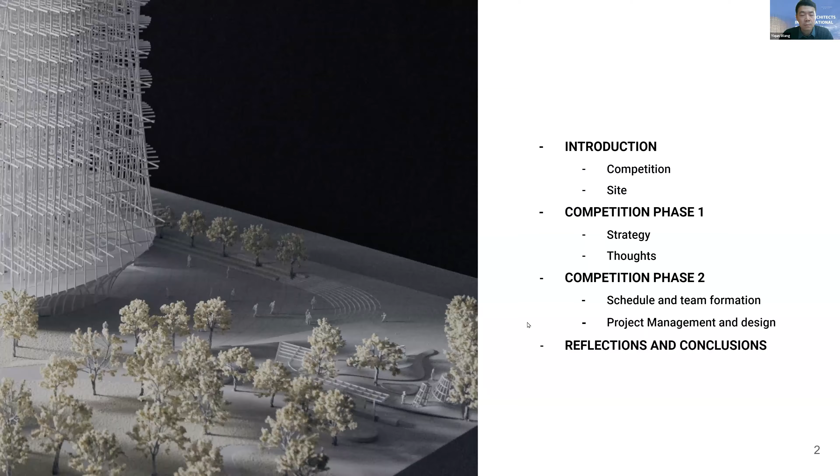I think you are muted. Okay, can you guys hear me? Yes. Okay, cool. Yeah, thank you for the introduction.

My name is Riza. I want to thank China GSD for the invitation, and Talks from Cambridge for organizing this event and inviting us to share our experience. I will start by introducing the competition and its context. I will walk through our initial design for phase one and talk about how Qinrong and I collaborated on phase one, so my part will be very short. Then Qinrong and Zishen will talk about the experience in phase two. Hopefully you can see the sheer increase of complexity from phase one to phase two.

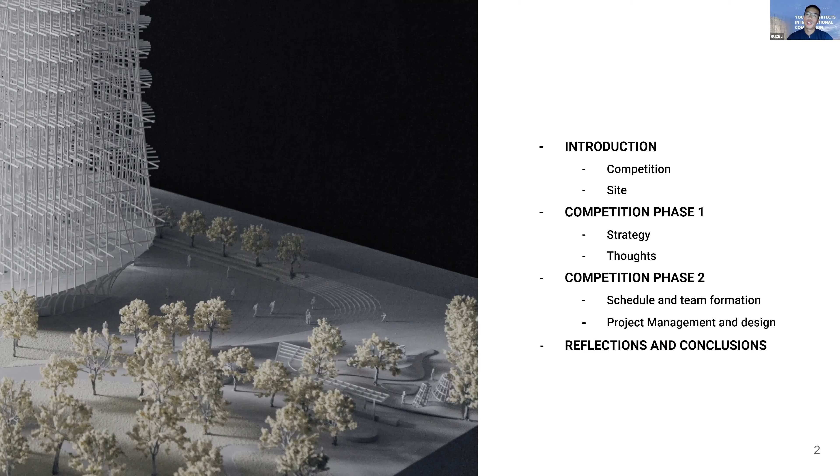I think retrospectively, there are many unique aspects to our experience. Firstly, it happened during the pandemic, so we were forced to collaborate in a very different fashion. Secondly, it started from a very small two-page competition proposal, and all of a sudden it expanded into a multi-team project involving over a dozen companies. In phase two, Yuqing, Zhengcheng, Zishen, and Caoqi also joined our design team, and we formed a small practice called Comunio. Last but not least, the competition itself offered a great deal of opportunities, and we, as fresh graduates with very limited practical knowledge, had to take leadership and deliver the project. So even though in the end we didn't win the competition, for us it was a very valuable journey.

So I will start to introduce the competition now. The original San Jose Light Tower was constructed in 1881 and destroyed in a storm in 1915. The light tower itself was a pioneer in the use of electricity for municipal lighting. Some may even say it inspired the creation of the Eiffel Tower and many subsequent tower-type landmarks in our generation. San Jose, on the other hand, has become the center of Silicon Valley, the heart of technology, entrepreneurship, and innovation.

However, unlike many big cities in the States, San Jose doesn't have a city icon that represents the image of the city or celebrates the achievement of Silicon Valley.

So some local community leaders started this competition called Urban Confluence to call for a design proposal. It states that the mission is to build an artistically inspired iconic landmark that will become the architectural legacy of our current generation of leaders, and present it as a gift to the city of San Jose, Silicon Valley, and to the world. The competition was announced in late 2019.

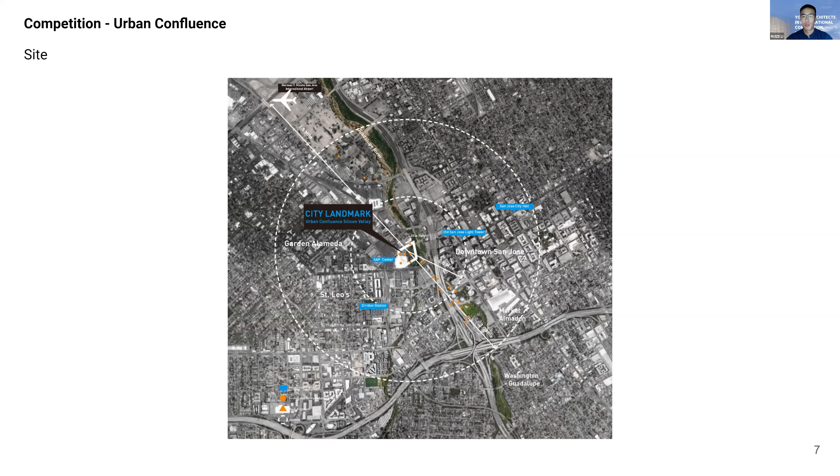The site is located in a park called Arena Green, right next to San Jose downtown, across the Guadalupe Freeway. It's been announced that the surrounding area will be developed by Google in the next 10 years. Though right now this area isn't really developed, potentially it will be the new downtown in the future for San Jose.

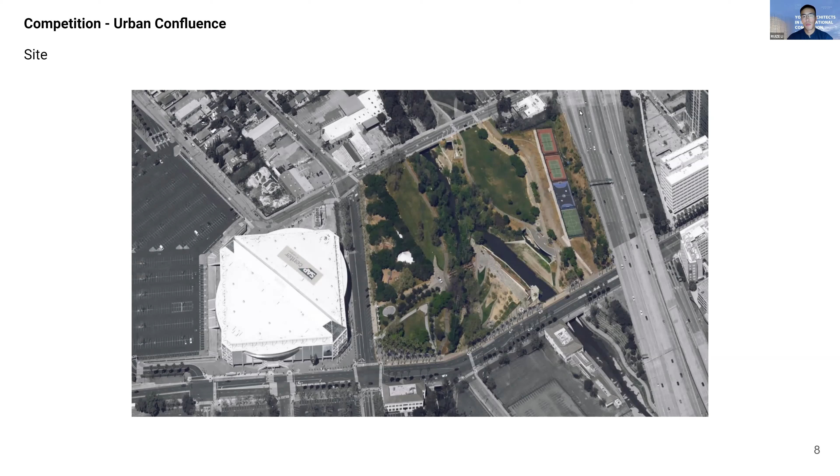Arena Green Park is right next to the SAP Center, home for the San Jose Sharks. The Guadalupe River runs across the park. If you think about it, 10 years ago it was a paradise for birds and fish. Now the river is heavily polluted, though the park is still used for its green lawn and some sports facilities. Generally speaking, the park is in very bad shape.

So in phase one, we only needed to propose a design idea on the site for the icon. In phase two, we actually had a lot of design interventions on the whole park, both in the sense of landscape design and urban intervention.

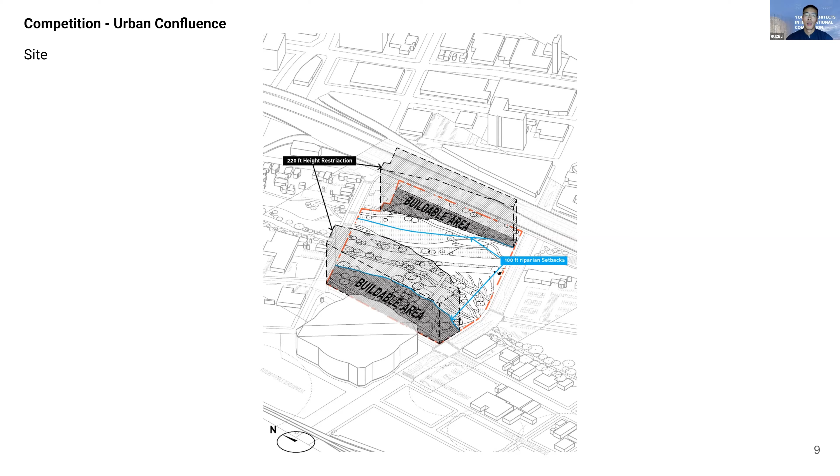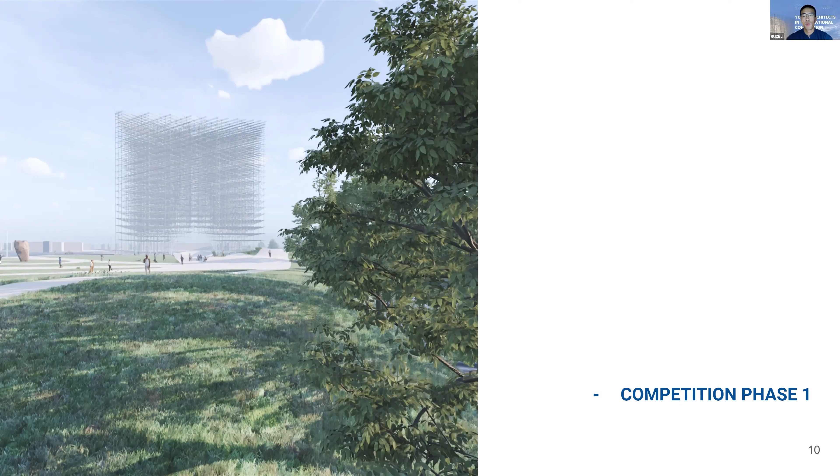For phase one design, if I recall correctly, we had probably over a dozen design iterations. We tried and failed—nothing really captured the idea of what is the city icon for our generation. So we restarted and tried to formulate a narrative in order to define what the icon of our generation should be.

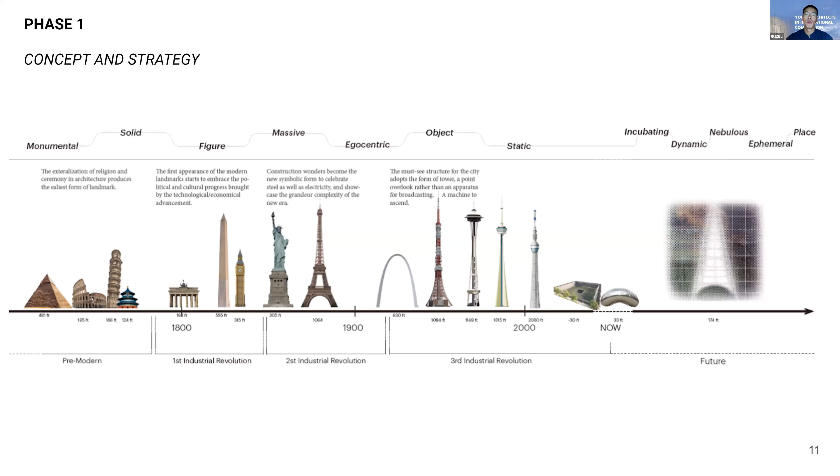We did some historical survey of landmarks and monuments, and we had this idea that the icon of our generation should be a place instead of an object. It should be dynamic and ever-changing instead of heavy and static. It should be incubating and inviting instead of just egocentric. Also, it should resonate with history, but still tell the story for the future.

So we had this idea—maybe we should embed the original San Jose Light Tower in some kind of generic frame that can be a virtual canvas or incubator for placemaking. On the right hand side, you see one of our very initial sketches, trying to capture the conceptual feeling of the future landmark.

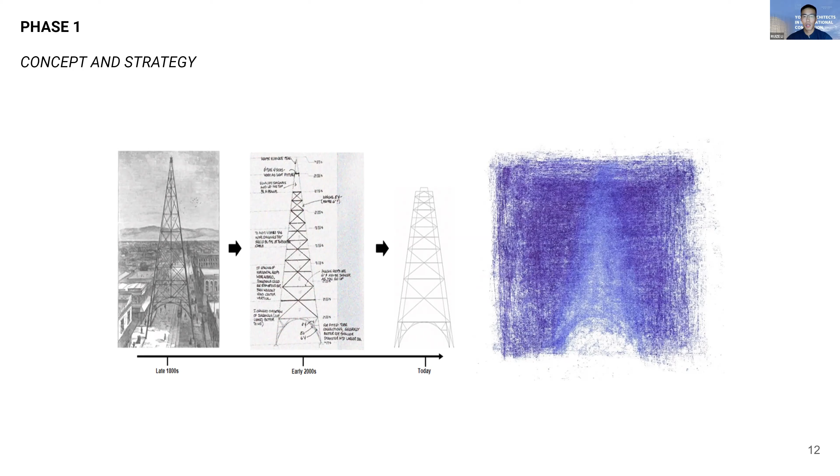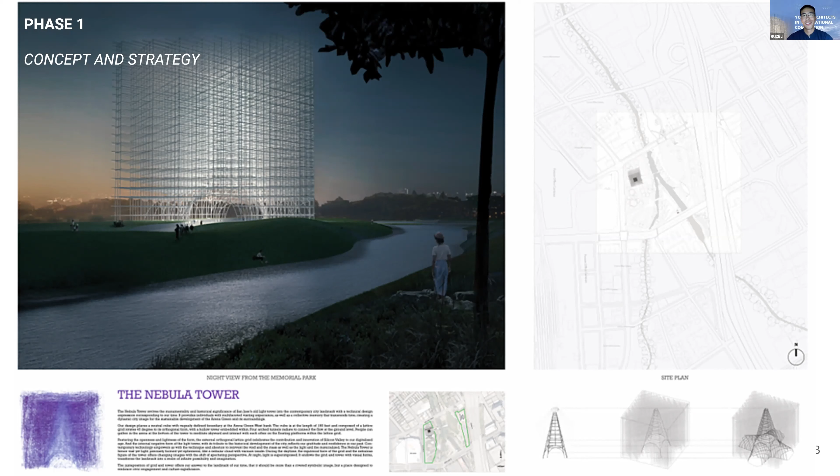It's a really simple and conceptual idea. There are two versions we actually submitted for phase one. We mainly wanted to capture the elegance, simplicity, and potential for the design. The design isn't resolved or developed in any way, it's purely conceptual—as you can see, it's just very unclear renders and some very simple drawings there.

Here's a short video. We can imagine the framework can be a 3D canvas to host all kinds of art installations and lighting installations.

So here are some challenges for phase one for us. Both Chino and I work remotely. We chat through Zoom like this every day and communicate through Zoom screen sharing, sketches, and 3D models. We have to consistently guess each other's design ideas and intentions, and ask each other to clarify things again and again, because the verbal communication and the visual don't really align together.

So the whole final design emerges from arguments, fighting, and rejecting each other's ideas. But I think those arguments and discussions are the most valuable things, because in the end, it's not one person convincing the other.

It is the better idea and better design solution that emerges from these discussions, and it convinces both of us.

Planning didn't work for us at all. We had a detailed schedule in Excel at the very beginning of the project, stating that in certain weeks we wanted to achieve certain things. But in the end, we spent 80% of our time on discussion, about 10% on modeling, and 10% on production. So planning will be a very different story in phase 2, and without proper scheduling, we won't be able to make it in phase 2.

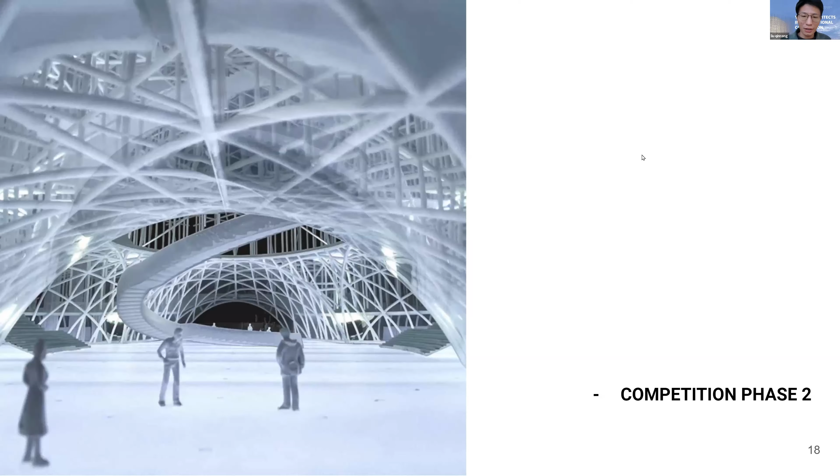Okay. So we can go to the next page. Rita, can you mute yourself?

From this page, we can see the timeline from the end of phase 1 to phase 2, and basically the structure of the Nebula Tower iterated from a pure cube to something more hybrid. But the urban strategy of our proposal stayed unchanged from phase 1 to phase 2, because the location we picked, the access, and the new connection we established in phase 1 remained in phase 2, and it actually became the strategy for almost all three finalists in phase 2.

What's different about this competition is that it goes so public that we get a lot of community feedback and public comments—some positive, some negative. But because this is a public project, you need to take all of them and digest them. On the other hand, you still need to be persistent and clear about what you need to do in this project, because after all, you do not know to what extent the public's comments will affect the jurors' attitude about the design.

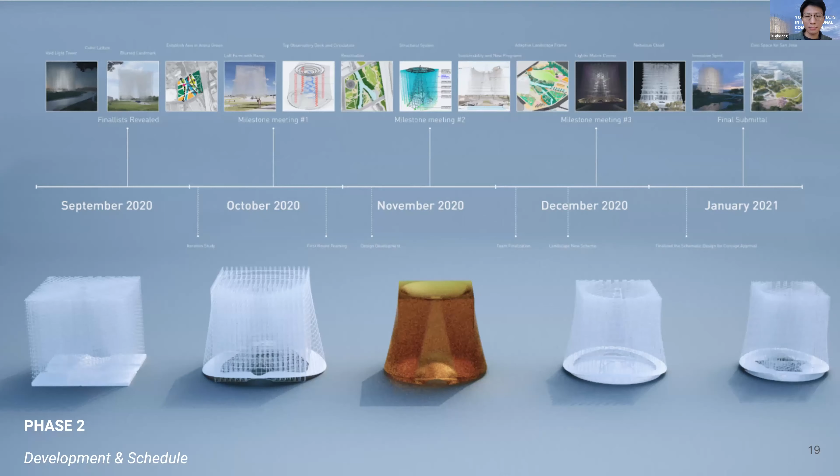Let's go to the next page. What troubled us at first was how to assemble a team in as short a time as possible. But actually, we didn't make it as we expected to.

We wanted to assemble a team within maybe a month, but it actually took much longer. At first we thought we should go for small firms, because they'd be easier to communicate with and more efficient, and we were afraid big firms might take control of the project or overwhelm us, making communication more difficult. But actually things went the opposite way—smaller firms, in the time of the pandemic, found it more difficult to take the risk of participating in this kind of competition, since they don't have enough stipend, while the big firms were interested in this kind of opportunity.

They would like to take the risk to be a partner with you and work together. So finally, with the help of the client, we reached out to HKS, and they also brought a lot of other consultants on board with us.

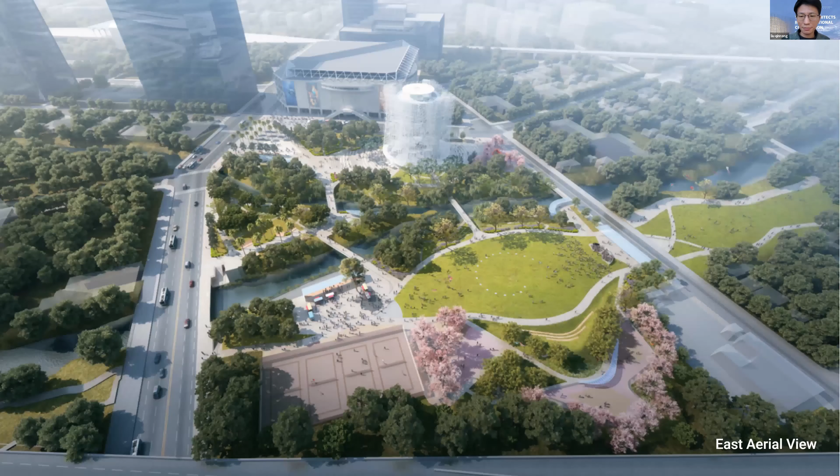So our main focus for phase 2 is basically to develop the program, try to solidify the structure, reiterate the form, and invest more in the landscape design for the urban environment.

As you can see from this aerial view, the Nebula Tower is located at the northwest of Arena Green, and there is a plaza that goes underneath the Nebula Tower from south to north. We also added two bridges to connect the west and the east. Zishen will introduce more details on the design of Arena Green Park later.

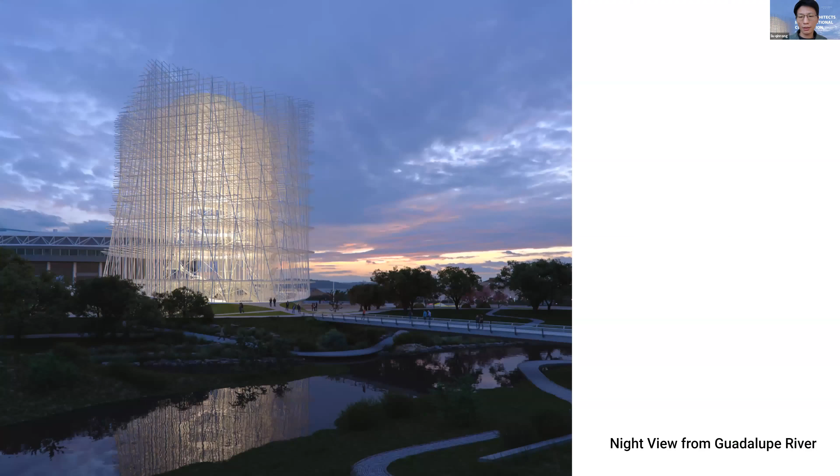This image is a view from the trail across the river, and this is the poetic rendering image that we love the best, because it clearly shows the blurred boundary between the structure, the light, and the nature. The revealed symbolic figure of the light tower, I think, really evokes an emotional bridge for people about the memory of the past and the imagination of the future.

It also shows how you can walk through the bridge and get to the ramp level directly. The structure here emerges from the ground, but it still looks very lightly floating on the landscape.

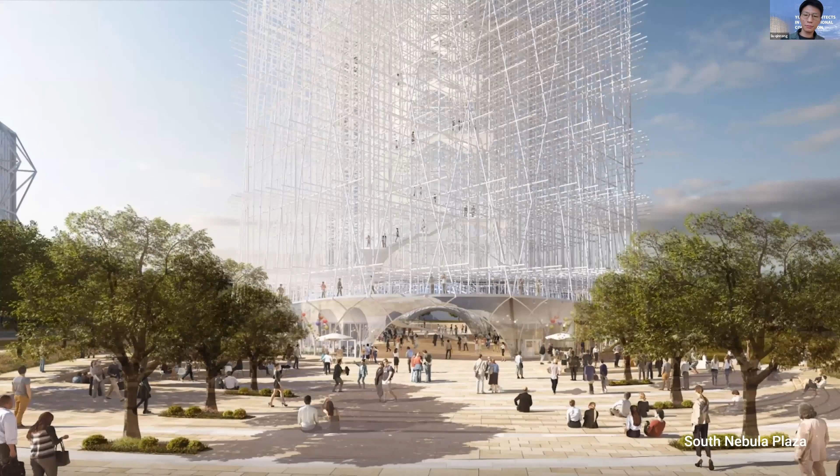This is the Nebula Plaza on the south of Nebula Tower. Visitors can draw into it, and this plaza aligns to the existing urban environment.

Because this is the image of the daytime of Nebula Tower, you can see how it looks like a vaguely pixelated cloud floating above in the background. It shows a very open and welcoming gesture, which makes it so different from other landmark projects in this world.

What's important about the design is you can see all the lattice within it is 45-degree rotated, but they are still orthogonal with each other. This is an important move we decided to do because it can break the boundary reading after all. Otherwise, the boundary of the Nebula Tower would be too clear to read.

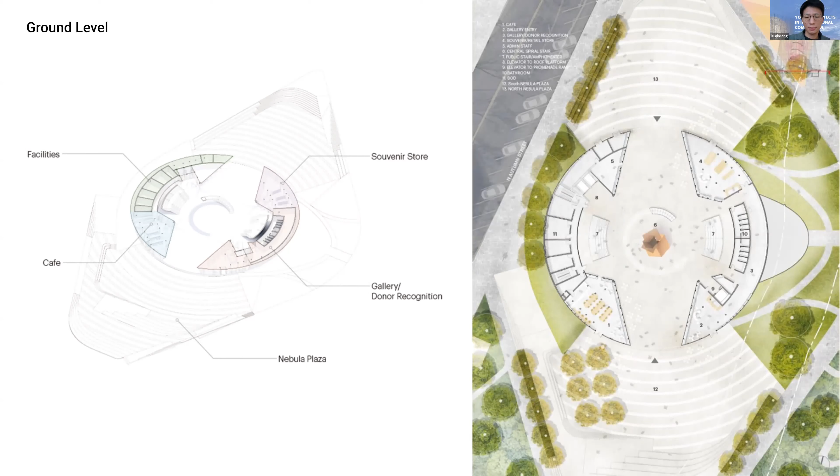The central plaza is a flexible space that can accommodate sculptures, especially large-scale exhibitions, and could also be used for live performance art as well.

This is the linear space at the east ring, which is under the landscape. That is a flexible zone for donor recognition alongside rotating art exhibition. This is a program that the client strongly required.

We are arriving at the promenade ramp level. This is the interface, both urban and natural. This level is both inward and outward because inwardly it's integrated with the central plaza, and outwardly the landscape seating also offers a pleasant resting place for viewing the Arena Green as well.

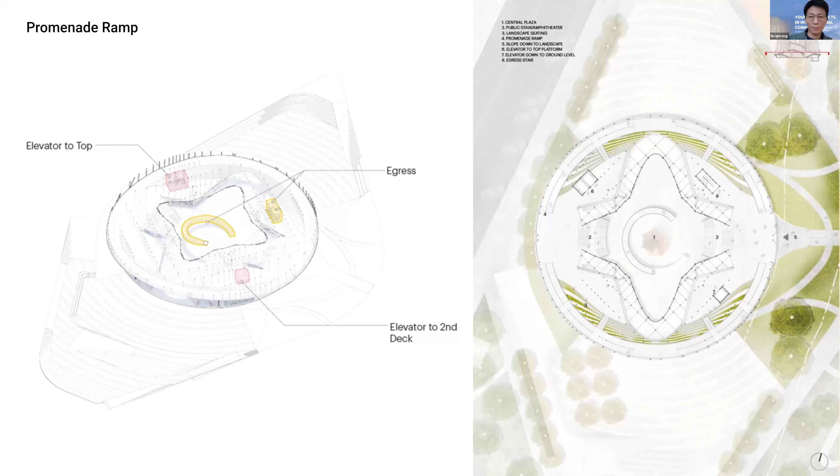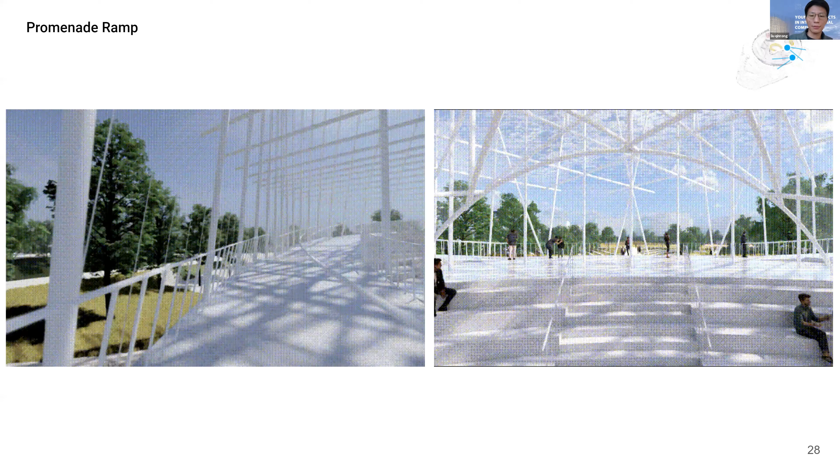Those are two GIFs that show the sequence of how you can ascend from the amphitheater seating and the ramp level while immersed in this delicate lattice structure, and visitors can enjoy the view of the park through the ramp sequence.

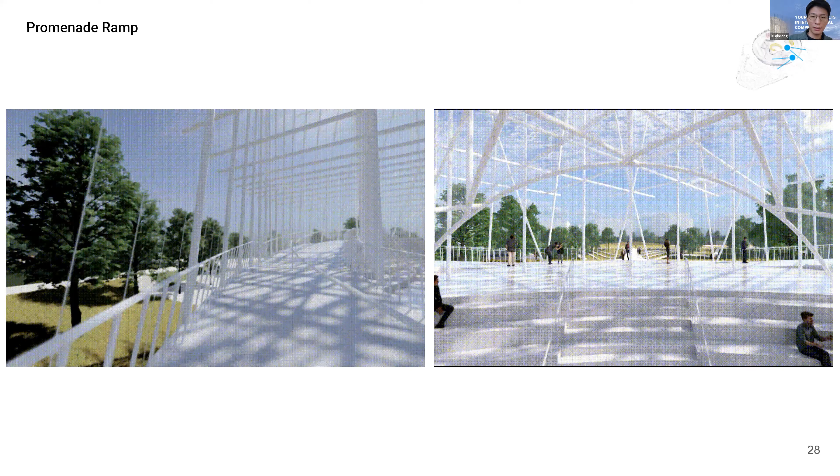We also added a visitor center, or let's say an event space, at the top of the Nebula Tower for people to overlook the city, because it's a place that is very close to downtown, where you can also see the distant mountainscape.

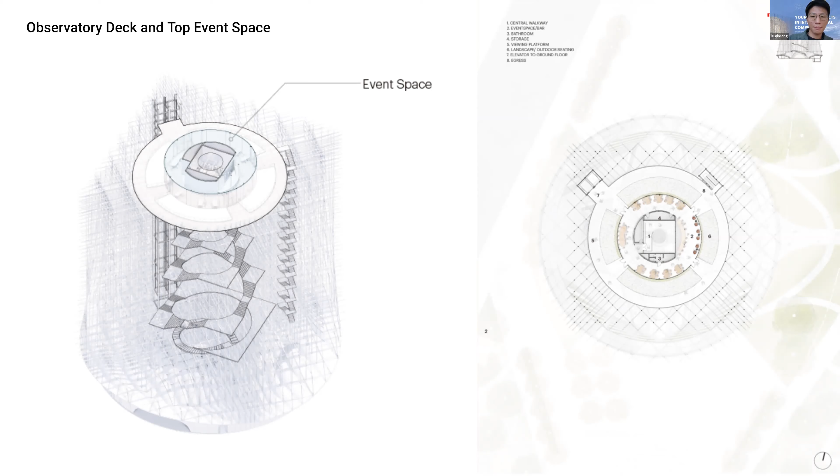The North-South section cutting through the central plaza illustrates the abstract open flow space at the ground level, which connects the architecture, the landscape, and the urban environment, which also makes use of the atrium of the hollow tower inside.

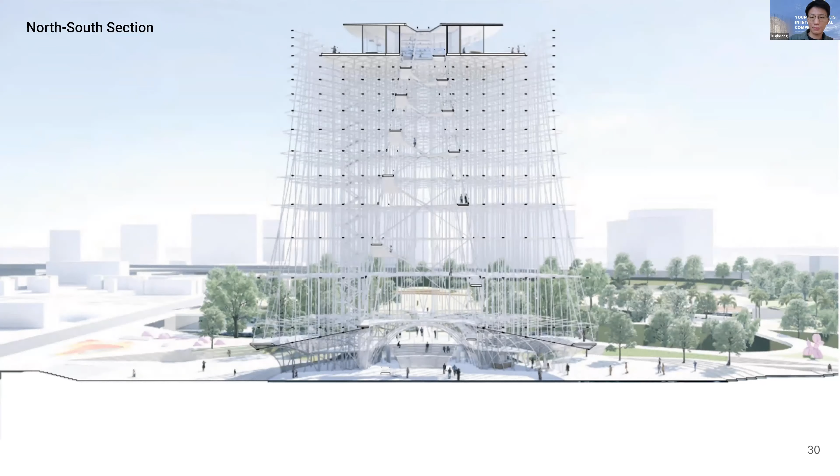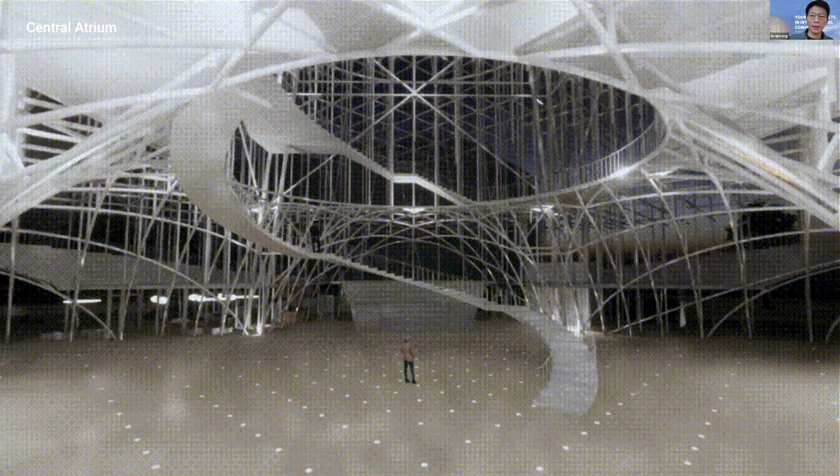This is also an animation that shows how you are standing inside the central void, surrounded by this immersive environment created by this monumental repetition and the enormous lighting matrix.

When we are approaching the central stair of the void sequence in the middle, it also offers the opportunity to ascend inside the void tower. The ensemble of the light and the shadow created a very unique, sensational, essential experience, because it gives you a sense of infinite depths of time and space.

This drawing gives us an overview of the circulation and the program. You can see 2 elevators to the top deck on the northwest corner, and another small elevator that takes you to the ramp level. You can see 1 egress staircase at the northeast corner, and 1 central grand stair that goes spirally around the void tower and connects the interior plaza and the top event space.

The circulation elements are purposely merged into the wire lattice of the Nebula tower. We discussed a lot with the vertical transportation consultant, the VDA, and our code consultant about how many stairs we need and how large the elevator shaft should be, including how they can fit in, because we need to know the dimensions and everything, so those things can fit into the grid system we designed for the Nebula tower. Finally, the elevator shaft has a structure that is independent from the lattice itself, but it is also merged with it.

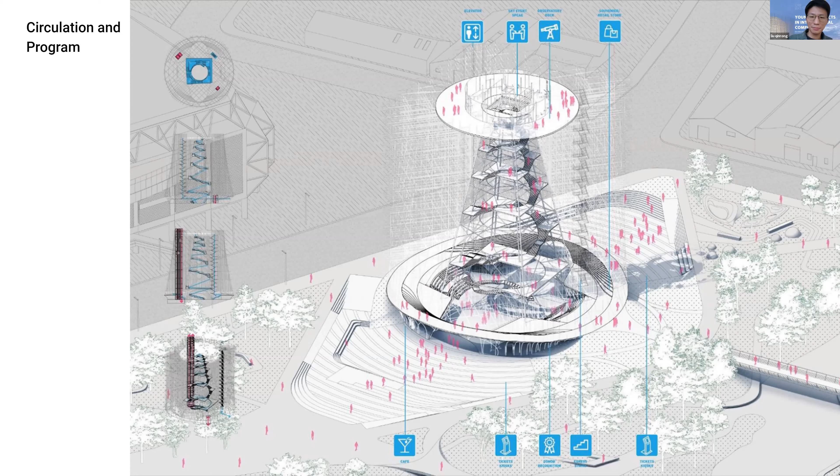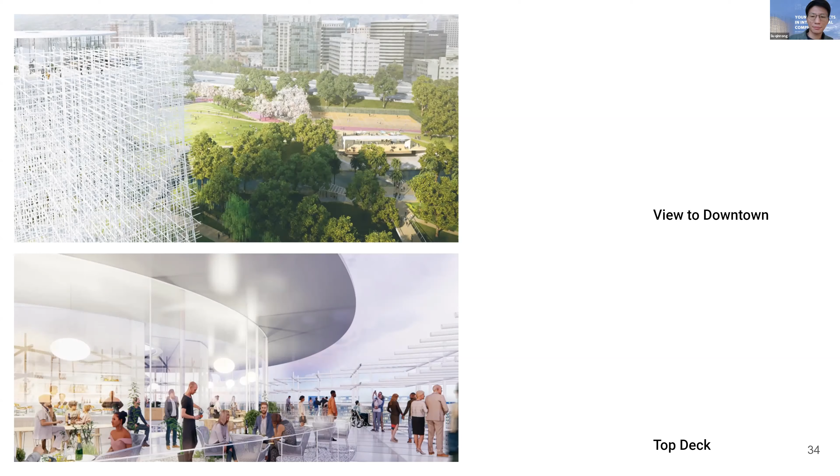We played with it for months with inputs like programs, site restrictions, boundary, and void geometry to find the best iteration. This design approach gives us a very flexible and adaptive system to adjust the design. But the script can only give us a very schematic form. Every time we need to make modifications, there is still a lot of manual work we need to do. We need to observe and make corrections to make sure all the details are right.

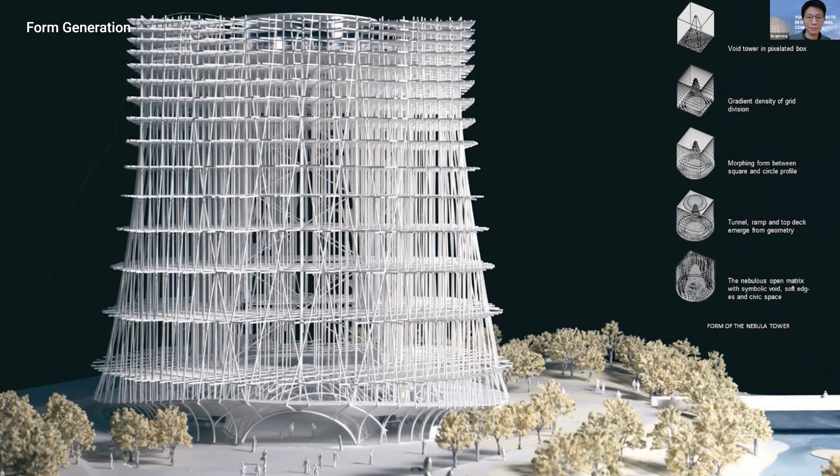Another overview of this is the digital lighting matrix that we talked about, because it could be a 3D canvas for all kinds of artists about lighting performance, and it's very flexible compared to those traditional 2D or planar lighting performances in the past, and it becomes very volumetric and dynamic.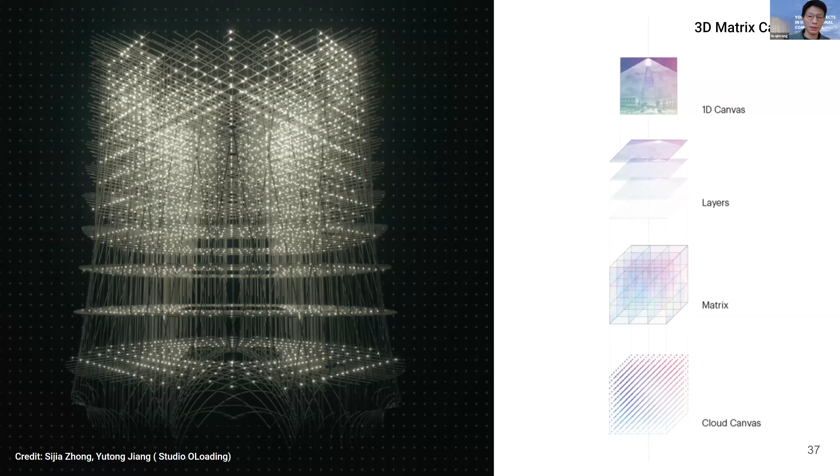When communicating with the lighting consultant team, besides the performance, the client is also concerned about how the light pollution would impact the ecological environment and aviation. The lighting team finally gave us a very detailed guide about how we can control the lights and how we can make sure all the angles of the lighting devices are right to avoid all those issues.

Those 2 images are demos created by Studio OLoading about the dynamic lighting matrix. You can imagine this Nebula tower is 170 feet tall and 130 feet radius on the plan. You can imagine such a big lighting matrix sitting there, and you can immerse yourself in how marvelous an experience that could be.

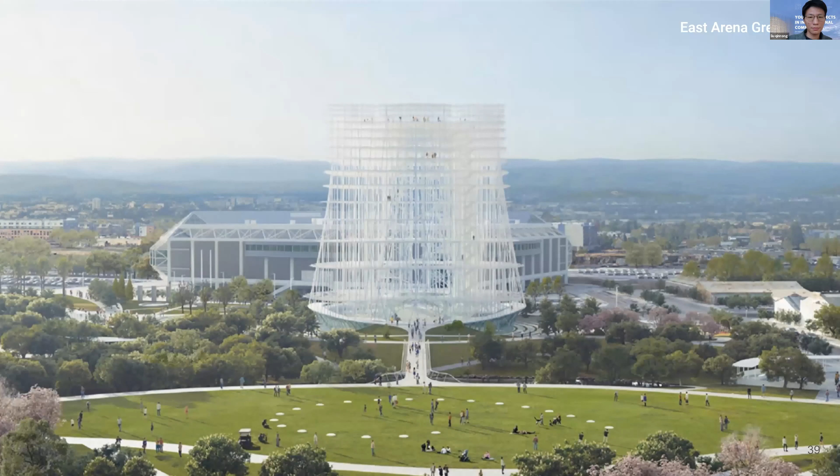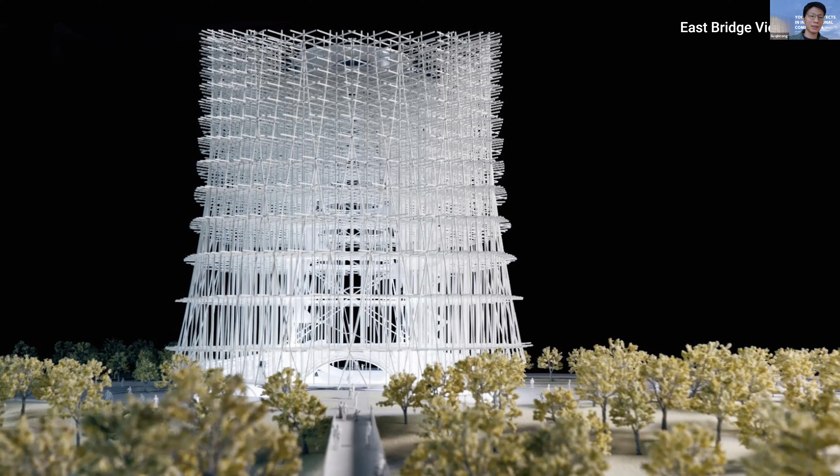This is another very important view, seen from the east bridge, which is also close to the view when you are running on the highway and you see the Nebula Tower from a distance. We built a physical model for this view, and you can stand on the bridge and see the Nebula Tower. You can see this very ambiguous figure of the tower inside.

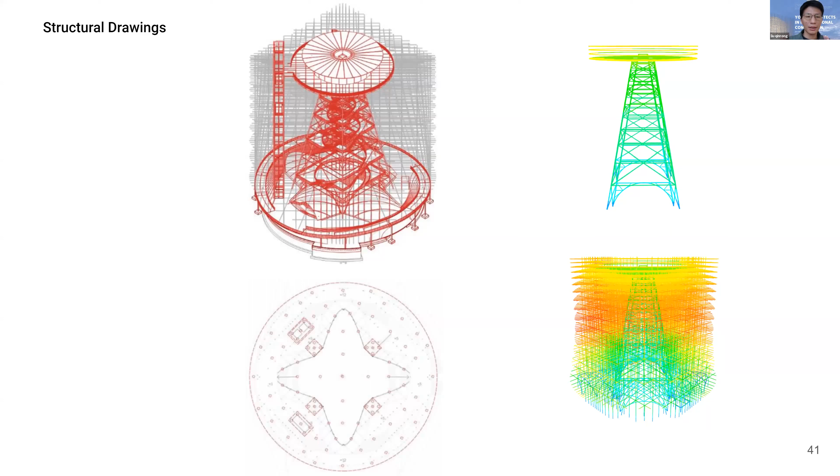Our structure team took a lot of effort to make this structure work. They took a lot of loads into consideration, like the self-weight and live loads from people and elevators, wind loads as well. Because the California area is a place with earthquakes, they also took seismic loadings into consideration. As you can see on the right, these 2 images show how the shaking would look like in the simulation, and that basically defines the 2 layers of the system of the structure.

As you can see, the tower is the primary structure, and the lattice around it is the secondary structure wrapping around it. This 2-layer structure would allow the fireproof issue to be easier to pass the code.

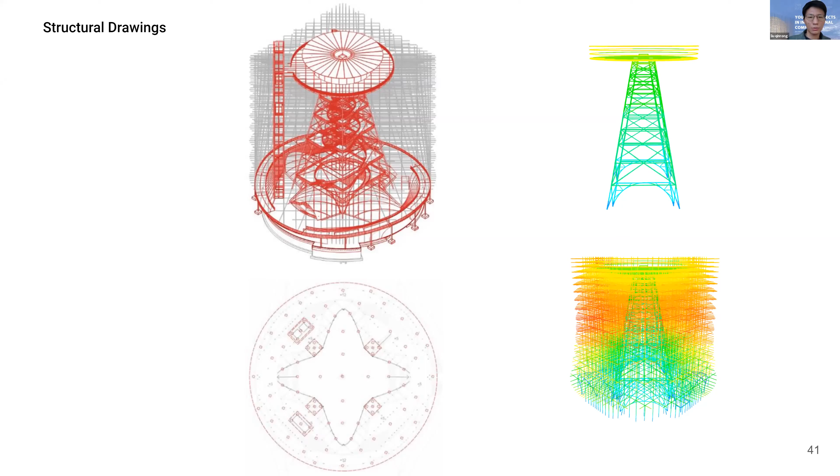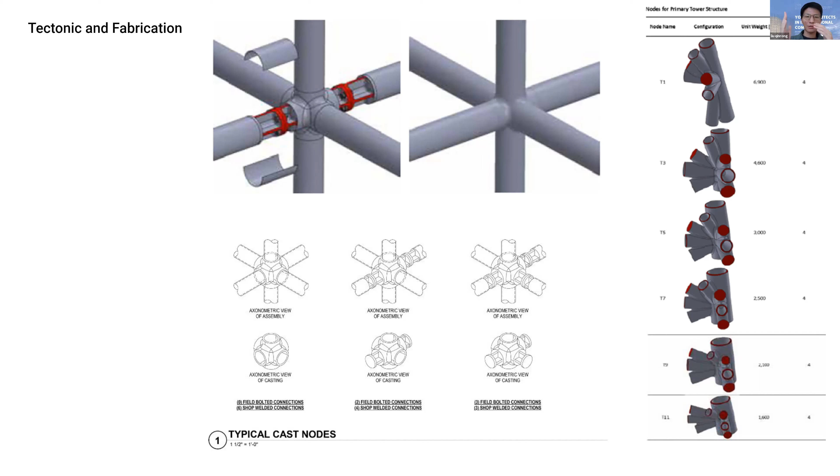So for the next part, it will be passed to Zishen to talk about the landscape design. Thank you.

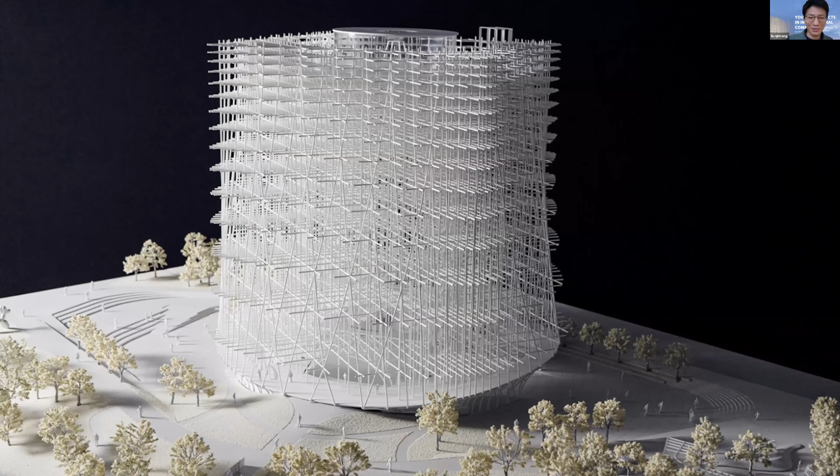Okay, I will start the landscape design, let me share my screen. Since time is pretty short, I want to make this fast. In terms of working as a landscape architect with Chelsea for this project, there were lots of challenges for the landscape design, especially for this kind of practical project. I think there are multiple things.

The first is that landscape always works as a medium in between the architecture and the public space or public realm. So there are lots of things, not only about design, but also communication and collaboration we need between the ecological team, the architecture team, and other teams. I think that was pretty challenging for our team, for Chelsea and me.

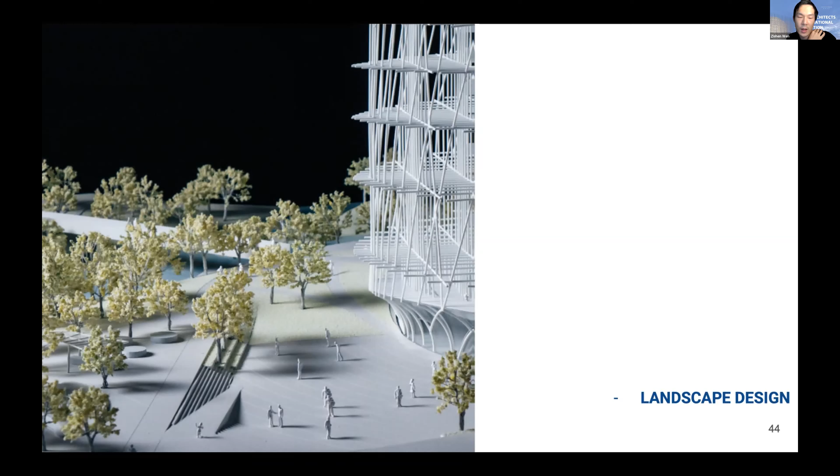We also spent lots of time collaborating with OJB, because they are a pretty professional and awesome landscape architecture firm. They gave us lots of guidance on how we could stage these things to make it more engaging in terms of public space design, and also in terms of the whole community engagement.

For the overall landscape design, at the very beginning we just had a pretty simple idea, a basic design. But after several iterations with the client and the whole team, we realized there are lots of great opportunities about the site, and the site is not only a confluence of two rivers, but truly a confluence of the city, culture, and all of those things happening here.

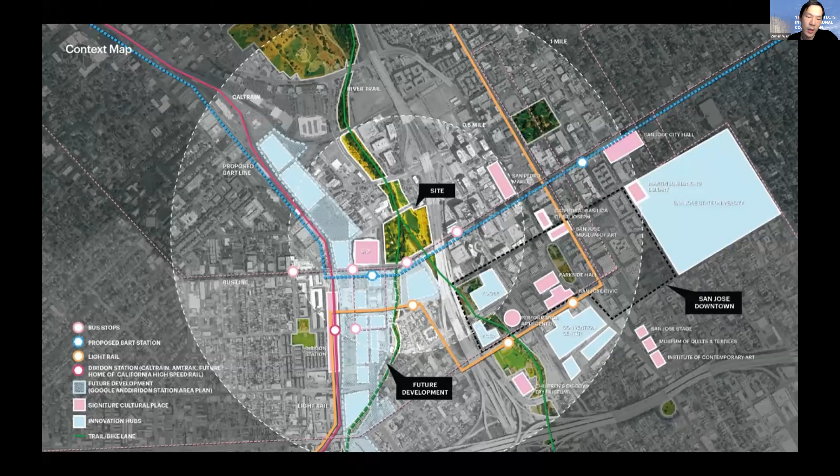In terms of the formal language, we are highly inspired by the ecological patterns around the Bay Area. We see this as a pattern that is flexible but also dynamic, incorporating all of those diversities, which is something pretty awesome for us.

So we built on all of those ideas, trying to make the landscape speak with the architecture, but in an opposite way, finally arriving at the same destination. We tried to have this flexible framework speak to the modular and rational framework of architecture. Ultimately, we're trying to achieve a goal where our overall design is very dynamic and diverse, so people can engage or participate in all of those activities.

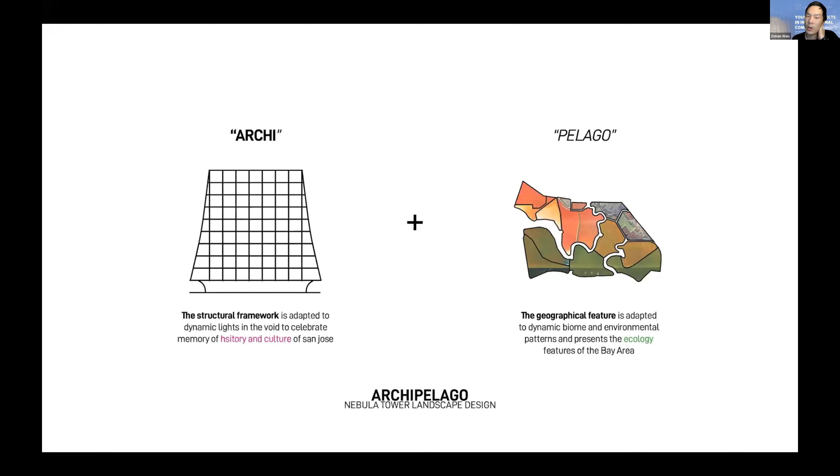In terms of the overall design, we try to speak with the architecture's axis, but still connect the site with the overall urban context, to provide access for people to enjoy the site and use spaces previously not allowed to be accessed, or that were just leftover space.

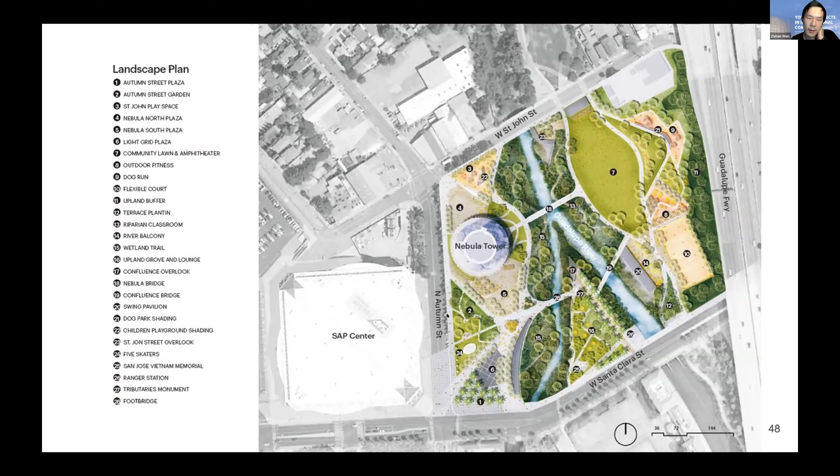So then we replanned the circulation of the site, trying to reactivate all of those spaces and make them useful for different kinds of activities, while still aligning them with architecture, because it's important to have all of those entrances and working environment experiences for people to get into the site.

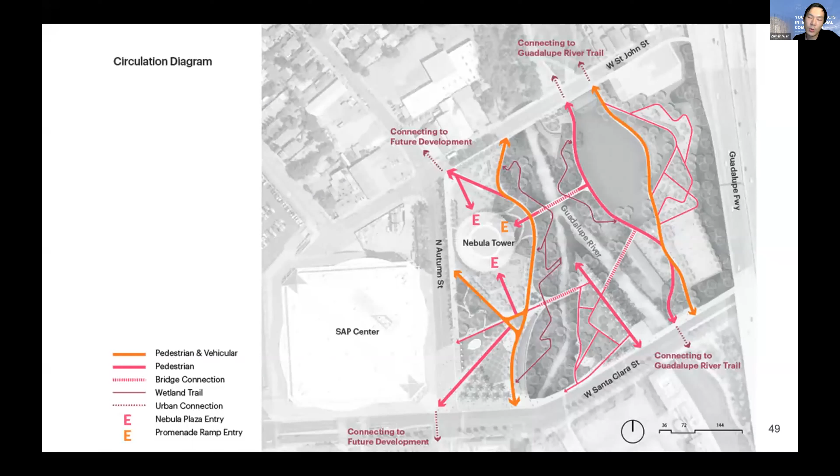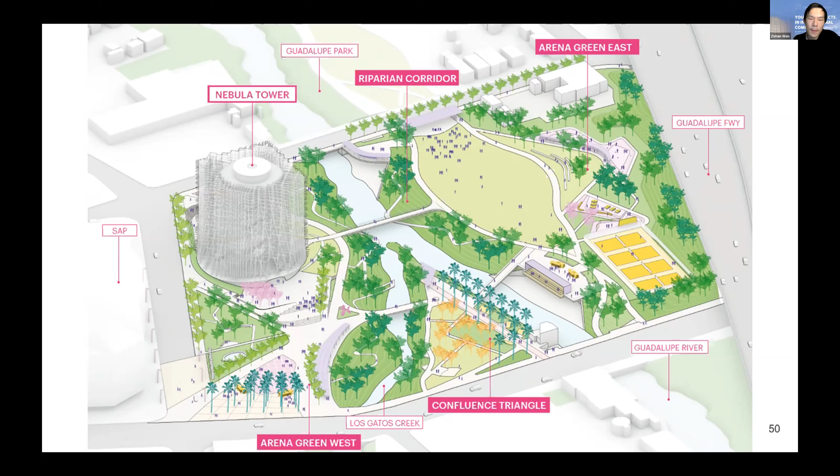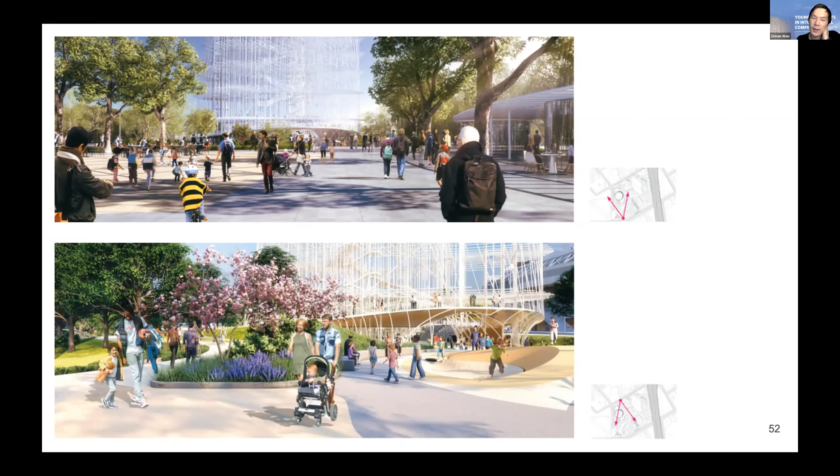One of the things we learned from this is that designing public space in the US context is not only about designing some cool form or fancy thing, but trying to think about how your design can be really inclusive in terms of different people being able to enjoy it, and also how multiple activities can emerge from there.

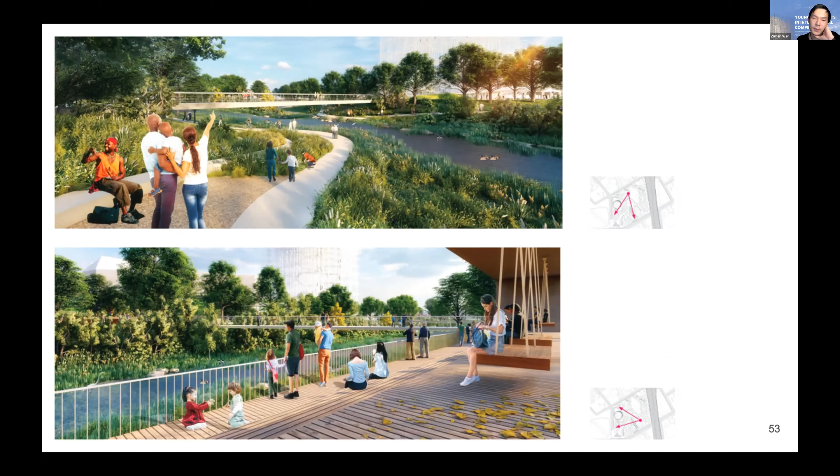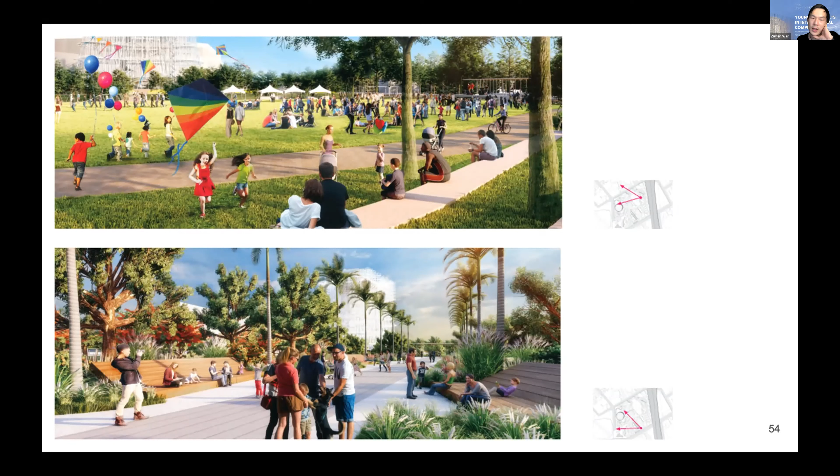This one is trying to create an accessible experience for the river, which was previously really hard for people to reach, but we created trails and balconies for people to have an understanding of the water and its values in terms of culture and also ecology. That is multiple scales of space and multiple activities - some are huge gathering spaces, some are more inclusive and more enclosed.

All of those are technical drawings we created from landscape and urban planning towards architecture. There was back and forth collaboration with HKS and OJB to create those SD standard technical drawings, and that is something we really learned a lot from - how we can draft out or call out things in a proper way.

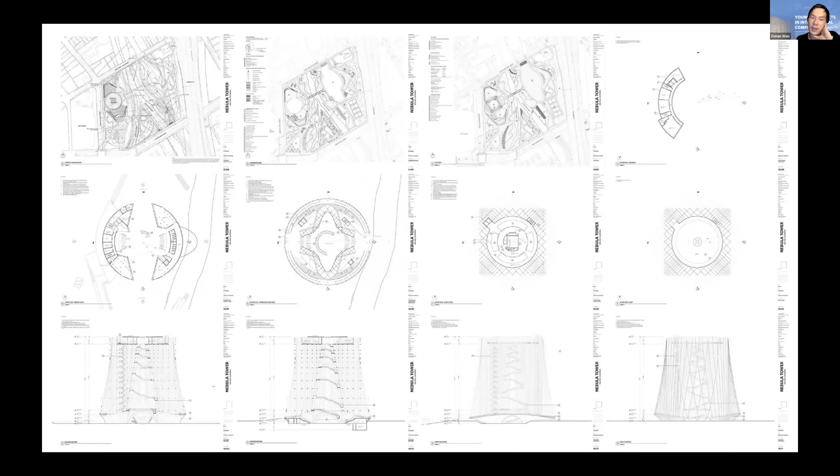So that's it, and I will close the presentation and bring us to the next step, which is the Q&A and open discussion.

Yixing, I'm not sure if we are going to the Q&A or the symposium talk between our team for now. Yeah, let's start with the symposium and then we will have the Q&A section. And if you have any question in the process, please send it to Jing.

So after the introduction of the competition, we will have some conclusion and reflection on this competition as well.

Personally, one thing interesting in this competition is that we actually invited two rendering firms to create renders for us. The most beautiful image you can see as the poster and in our background is from a very expensive individual rendering studio. I love their work, but they're very expensive.

Most of the rendering are created by another, let's say, lower standard firm, and it's easier to communicate with them. They are faster and produce a lot of work, which saves the budget. But if we had more budget, we definitely would like a very high standard rendering firm to take over our work, and we'd also create a lot of renders on our own. That's why some renderings are not on the same style or standard, but that's the limitation of the budget - so that's the only choice we could make at that time.

Yes, hey, for me, yeah, I think Yuting said a lot of things I want to say. It's actually a very unique experience for recent graduates to get involved in such a high level project. It's not like working in our own firms, our companies. We have big projects, large competitions, but it's totally different when you are in charge of this kind of large project and dealing with other high level consultants.

I think one interesting part of this competition, different from other competitions I've been involved in, is that in the competition phase we actually have a lot of community engagement, like other people have mentioned. Usually when you do a competition it's either an RFQ, request for qualification, or just a purely conceptual design, where you make a package, your design idea, and then they select the winner and you go into the SD phase. But we are actually doing the SD phase during the competition with two other competitors. That's a very interesting part.

I think part of the reason is because all three shortlisted teams are similar, like us, no built work and no reputation built yet, and they need to kind of cultivate us, go through all the SD process with you together to see if you are really qualified to go forward. It may be a different story when you're working in a larger firm, but I think it really gave us a lot of opportunity to learn practical things and public thoughts, something like that, and how to communicate with people who don't know design but who know the place better than you, who are living there and have their own vision for the future.

The second part that's also very unique is that Yuting is working in an architecture firm and I'm working in a landscape firm. Architecture firms and landscape firms cooperate in design competitions a lot, but usually you see each other as a team during the competition while still being separate teams. In this one, the architecture design and landscape design are actually really working together. We text each other every day and meet like three times a week or something like that. It's very different from just making a package and sending it to the architect, and the architect making a package and sending it to you - we're really tweaking all the details together and doing each other's work.

About a contemporary landmark - we are envisioning something that connects the future and the past, something that recalls our emotion of the places and represents the identity of the city.

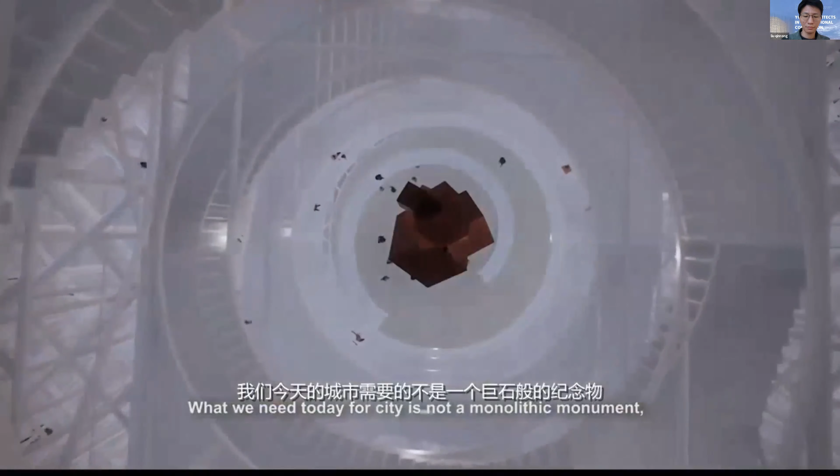A nebula is a massive cloud of dust and gas between stars, acting as a nursery for new stars. What we need today for a city is not a monolithic monument, but something we can engage with - something soft, ever-changing, and adaptable.

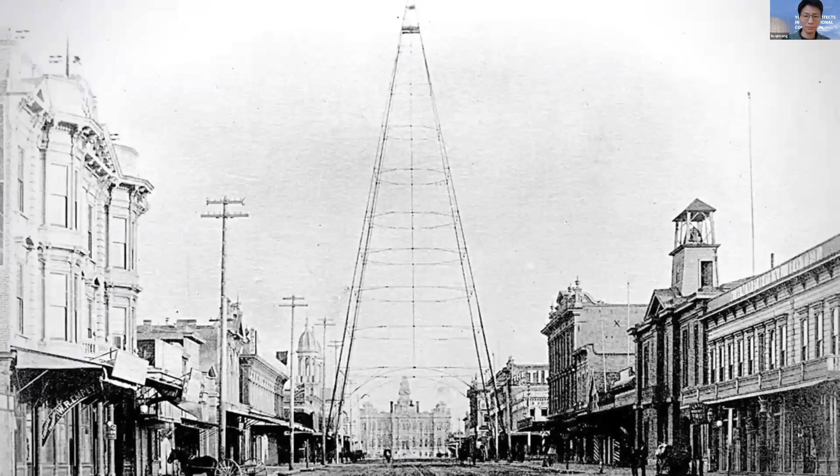As a great historical icon, the old San Jose Light Tower rendered the visionary courage of the pioneers of the city. Although the city is depicted as a tech innovation hub today, we would like to remind people that our city is built and evolved from generation to generation.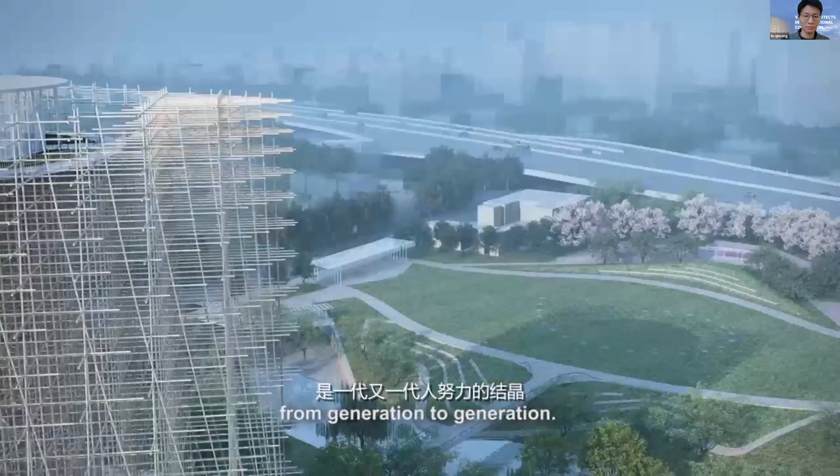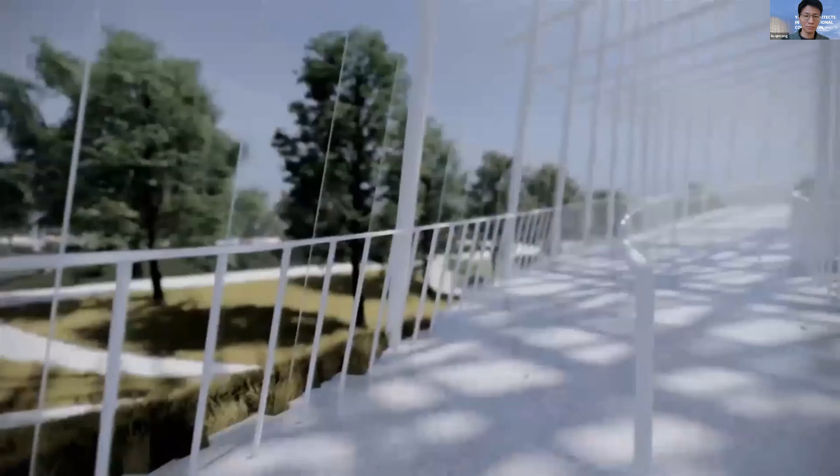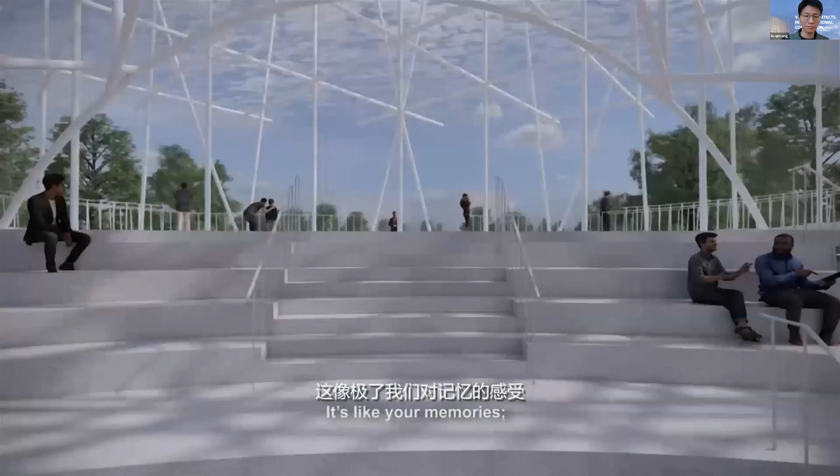Here, the traditional characteristic of a light tower as a figure is inverted into a spatial void. How we behold it becomes more nebulous - it's like your memories. They may look ambiguous, they may fade away, but they will unfold at a certain moment.

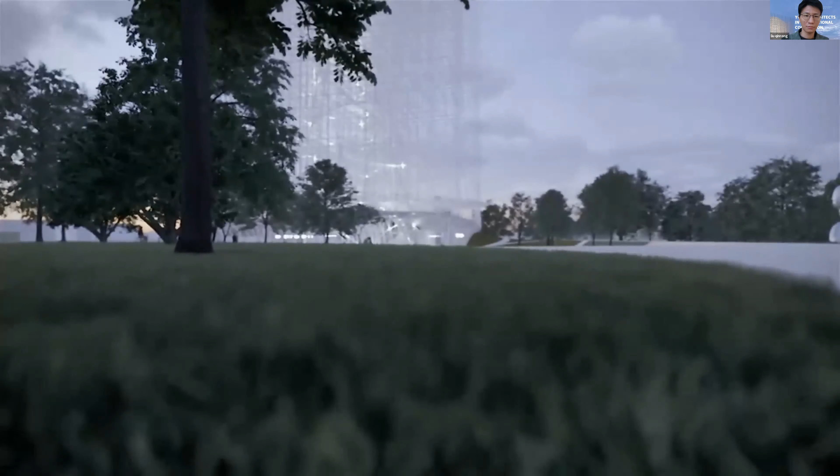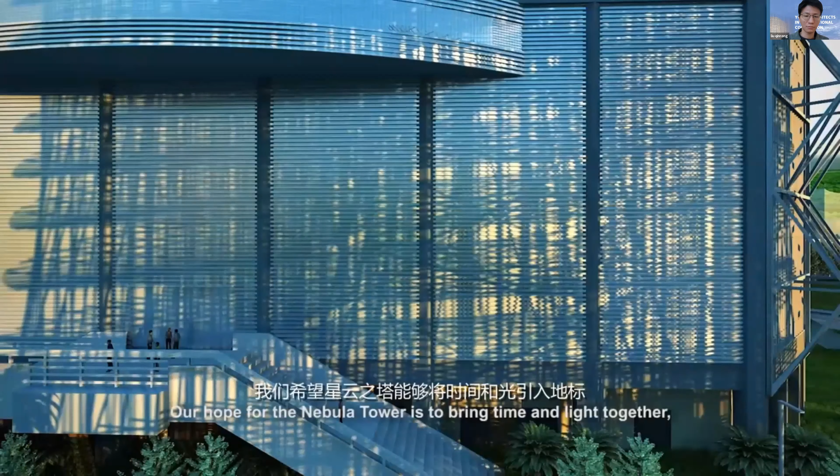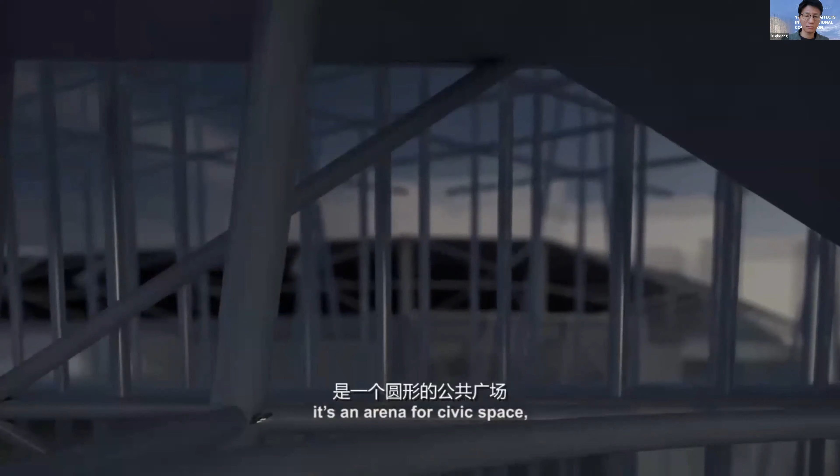Our hope for the Nebula Tower is to bring time and light together and to create a hybrid prototype of diversity. It's an inverted tower and an arched gate. It's an arena for civic space and an observatory for the city. It's a structured vessel for lighting and a canvas for all artists.

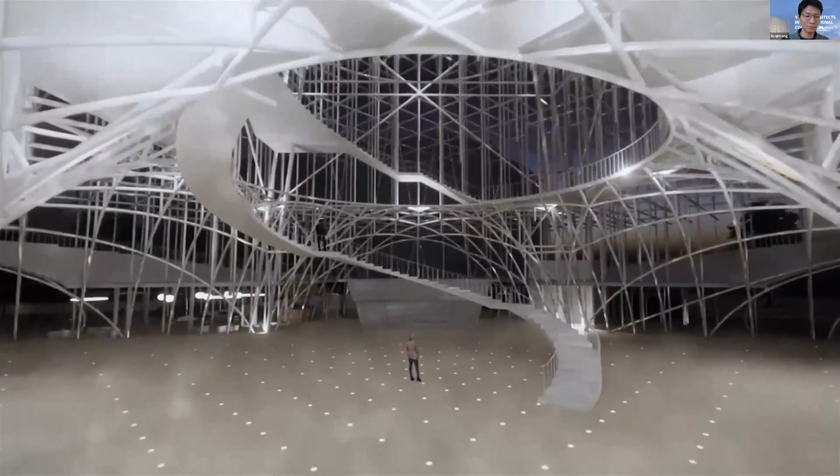Our collective memory and our imagination are the bridges of our innovative spirit and our city, and those are what enable us to transcend time and explore things beyond the boundaries.